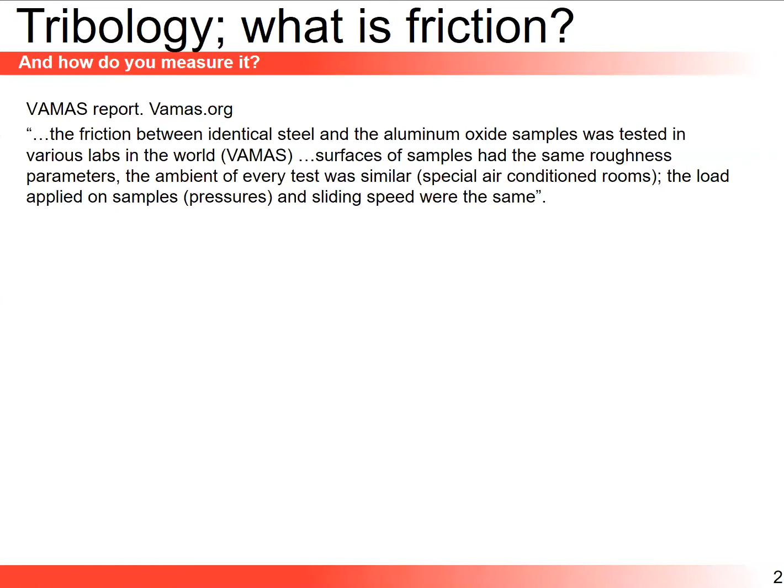For this, I'm turning to this extract from a VAMAS report, where this organization provided identical steel and aluminum oxide samples to various labs around the world with everything controlled - roughness, ambient temperature, sliding velocity, load. So everything is controlled, and they asked expert labs, people who really know what they are doing, to measure the friction coefficient. And that's the data that came back out of this report.

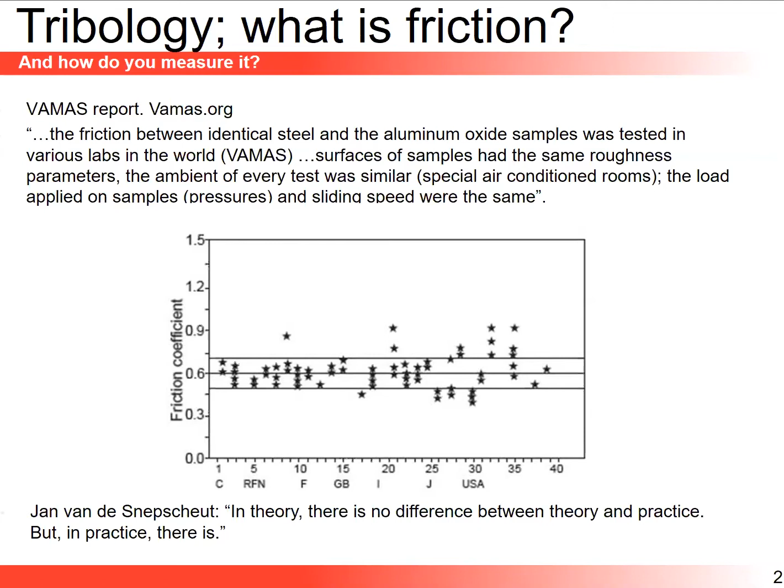So there are many good reasons why measuring friction is challenging - it's not well understood. I like to cite this scientist, Jan van de Snepscheut. He was, I believe, a computer scientist at Caltech in the USA, and he got crazy at some point - he wanted to kill his wife with an axe, failed to do that, burned his house, his wife and 3 kids could escape, but he died himself in the burning house. He said, and I love this sentence: in theory, there is no difference between theory and practice, but in practice, there is. So measuring friction is challenging.

So this talk is about third body generation for the most part, and related topics. There's a huge variety of mechanisms, physics and chemistry that explain why it's very hard to come up with predictive models of friction.

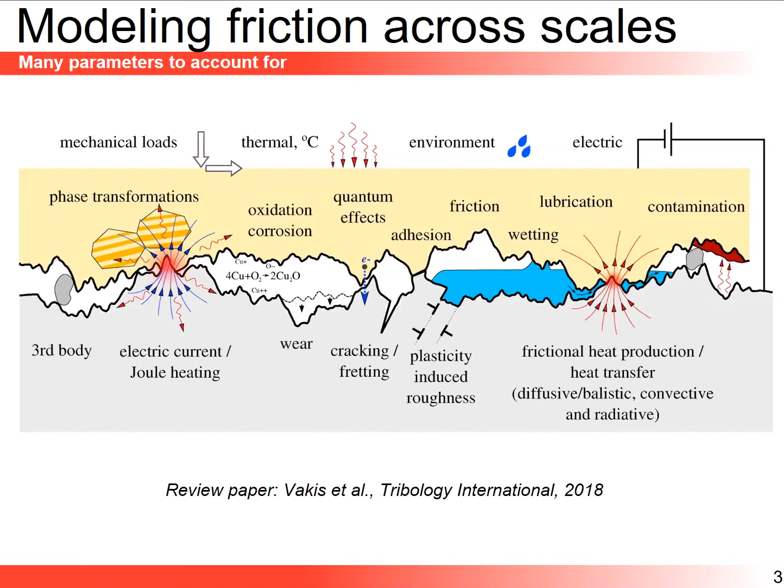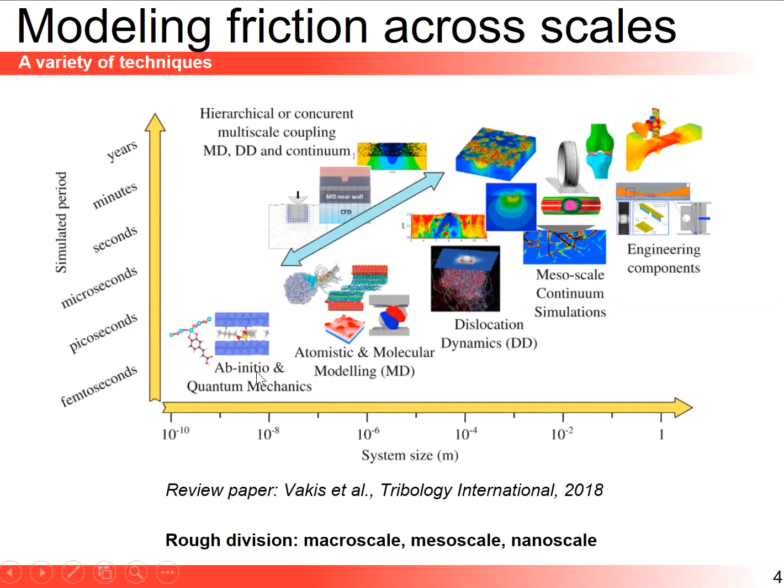Because of these different mechanisms, there's also a huge variety of scales and modeling techniques you can use to look at a frictional problem, and depending on what you choose, you'll have advantages and disadvantages. You may choose to work at a very large scale, the scale of engineering components like a tire and a road, and for this you may resort to finite element modeling, which lets you model very large system sizes and time scales - the vertical axis here - but you'll miss physics and chemistry from smaller scales. For that, you could go to ab initio simulations, but the drawback is very small system sizes and time scales. So there's no free lunch.

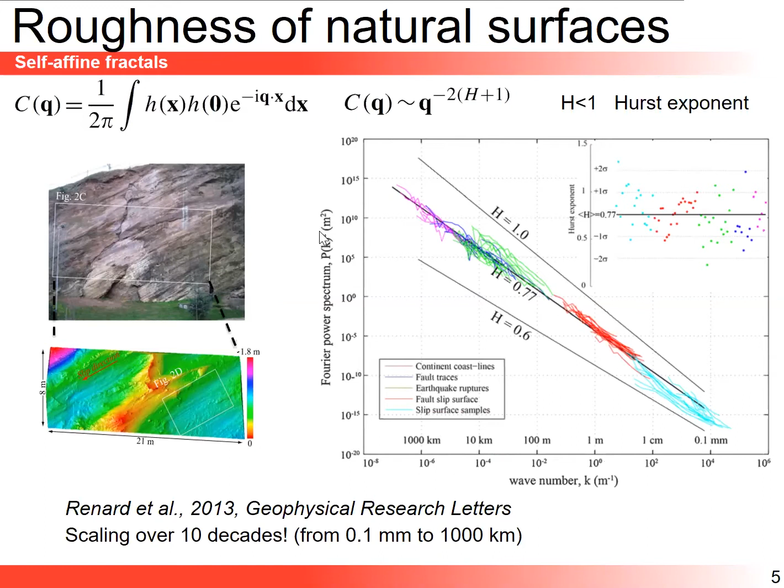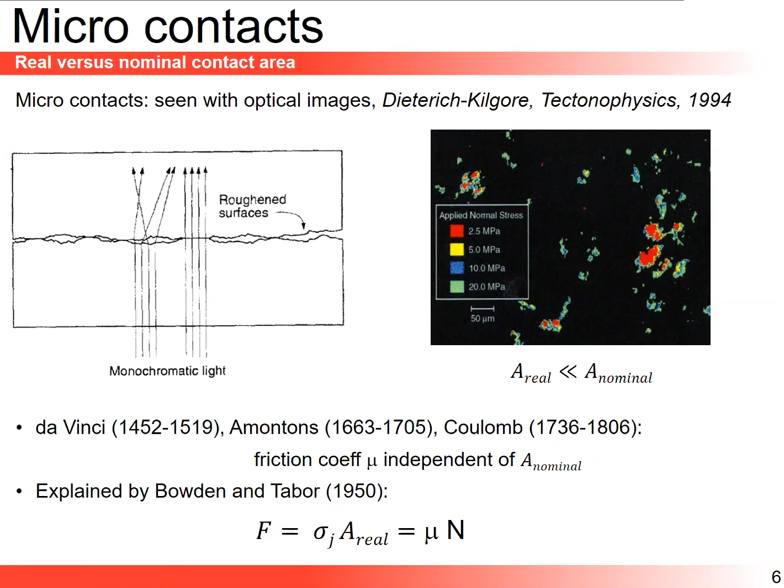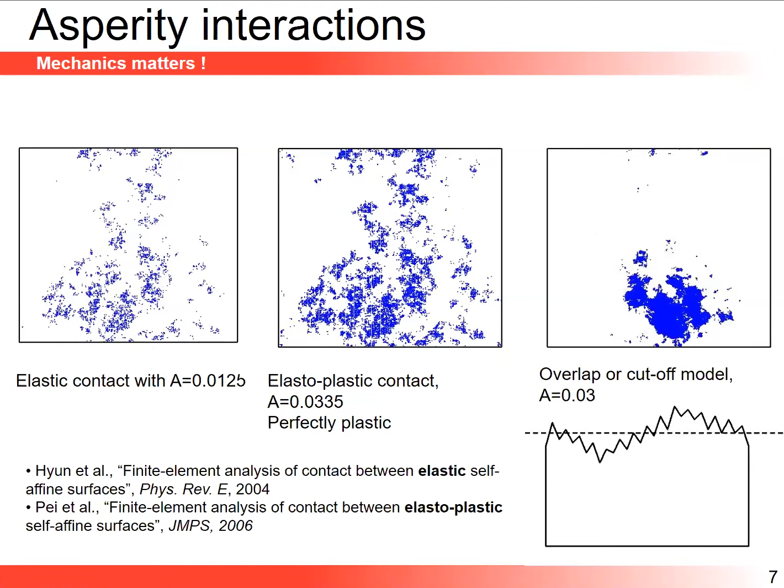So mechanics matters, which is good news for us with a mechanics background. So, this was a general introduction. Now I'm going to go to the heart of the topic.

I want to discuss wear of materials. So if you think friction is complicated, and it is, well, the bad news is that wear is even more complicated—it's messier. So here I'm citing Ernest Rabinowicz.

This is his seminal textbook on friction and wear of materials. And in this book, he writes that wear is an important topic. But although it's important, it has never received the attention it deserves.

The reason is that it's perceived as a dirty topic. There's complex physics and chemistry. There are many forms of wear—adhesive and abrasive wear are the top two. There's history, the roughness evolves with time. You form third bodies, you form gouges, different regimes.

I cite here at the bottom of the slide one of my favorite papers of all time, Meng and Ludema 1995, summarizing 50 years of research on friction and wear. In this paper, they give you 300 different equations on friction and wear, some with 25 different material parameters and fit constants. So there's a lot of empiricism in the field.

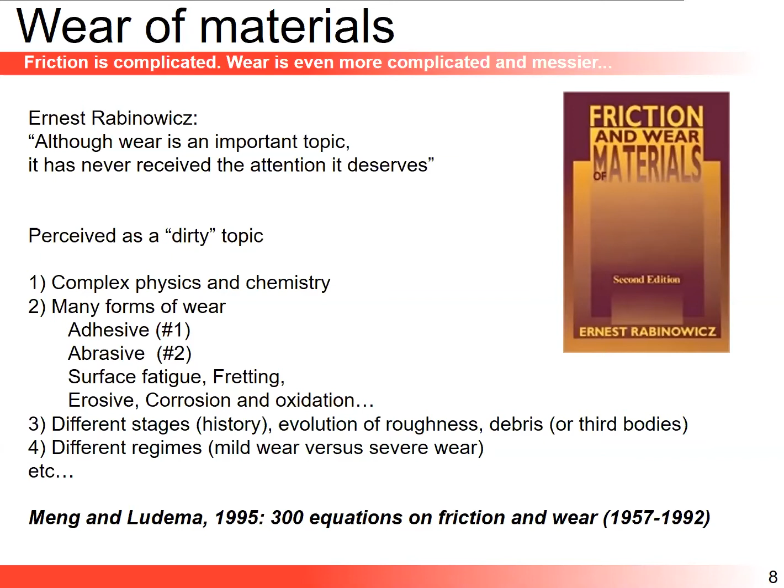What we aim to do is go back to the basics of the mechanism, to develop insights and come up with a predictive understanding, with no fit parameters, of the production of wear debris. That's our goal. It's very ambitious, and it'll keep us busy for many, many years to come.

Here I'm turning to the most known and most used equation for wear, out of those 300 equations. It's called the Archard wear law, very popular because it's very simple. This equation tells you that the production of wear volume V is linearly proportional to the applied load, linearly proportional to the sliding distance—which you can relate to the life expectancy of a component in an industrial machine—and inversely proportional to the hardness of the material.

And you have data here showing indeed this linear curve, this linear proportionality. The only problem is with this theory—and we go back to where this theory emerges from, a micromechanics description of why this equation comes to us. But the only problem is matching this theory to experimental data.

You need the famous K wearing factor. And this K wearing factor is not a small correction. It's not a 20% correction, it's not a factor of 2 correction—hell no, it's not even a factor of 10 correction. It's a correction, let's say, of 6 orders of magnitude. So it's a gigantic correction. And we don't know what K is.

To me, it's a major problem. Usually K is interpreted as a probability—surfaces are rough, we develop millions of microcontacts, and let's say 1 per million will form a debris. The moment you set a probability, you're confessing that you're playing a mathematical game, you're losing the physics, and it doesn't give you insight into truly what's happening, and why, and where you form debris.

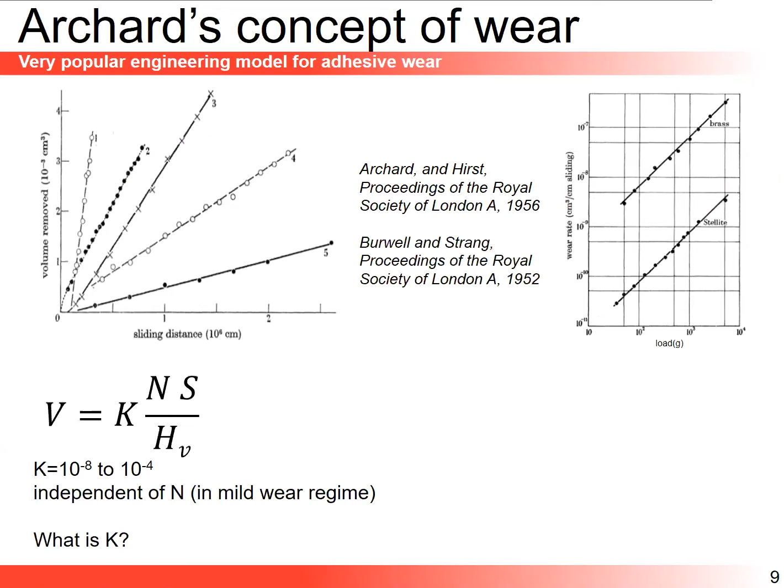When Archard came about with his model in 1953, there were competing theories. As a caution mark, in this talk I will not be mentioning what's known as the small load limit, grazing contact, where N is very, very low. This has been discussed in the nano-tribology community more recently, where it's been shown that you have an atom-by-atom attrition—it's a thermally controlled process, you have a breakdown of Archard. So I'm not discussing this.

I'll be discussing the higher load limits, where we have really strong interactions between asperities. Historically, going back 70 years, there were two competing theories. A theory from Holm saying that when you form an adhesive bridge between two asperities—here in the schematic, the strong adhesive forces—as you shear your system, they're going to move past each other by plasticity-induced atom removal.

Archard and others said no—when you form an adhesive bridge, you're going to get cracks and you're going to form debris. You see it here at the bottom, and you even have evidence from atomic force microscopy, with tips that are broken—you see a tip that has been broken and is attached to the side of the AFM.

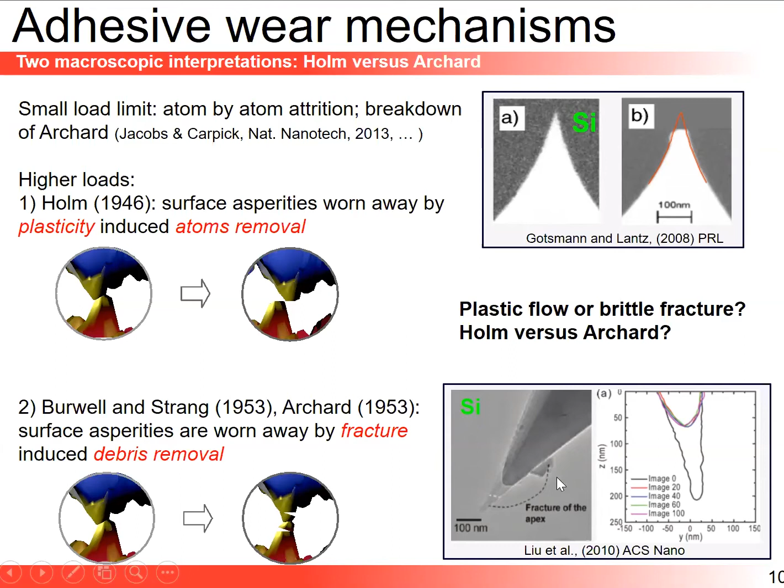So we have two competing theories, and five years ago we came up with a theory with Ramin Aghababaei and colleagues, and Derek. We came up with a model that says everyone is right—very consensual, very Swiss in a way—where we say both Holm and Archard are right. The only thing is, depending on the system, material properties, and geometry, we have a brittle-to-ductile transition, which has been known in material science for a long time.

So the model is very simple. It's basically a Griffith fracture mechanics approach. We take a very simple geometry of two hemispherical asperities, establishing a junction of size D. As you load your system in shear, you're going to store elastic energy in the system, proportional to the elastic energy density.

The elastic energy density is the strength that the junction can carry, sigma j. You cannot go above sigma j because it will flow plastically. So sigma j puts a cap. Sigma j squared over twice the shear modulus is the elastic energy density, and I'm multiplying this by the volume

of the two hemispherical asperities, so d cubed. So you store elastic energy, and you may use this - that's a second mechanism, that's Archard, to create some new surfaces. There's a price to pay for this.

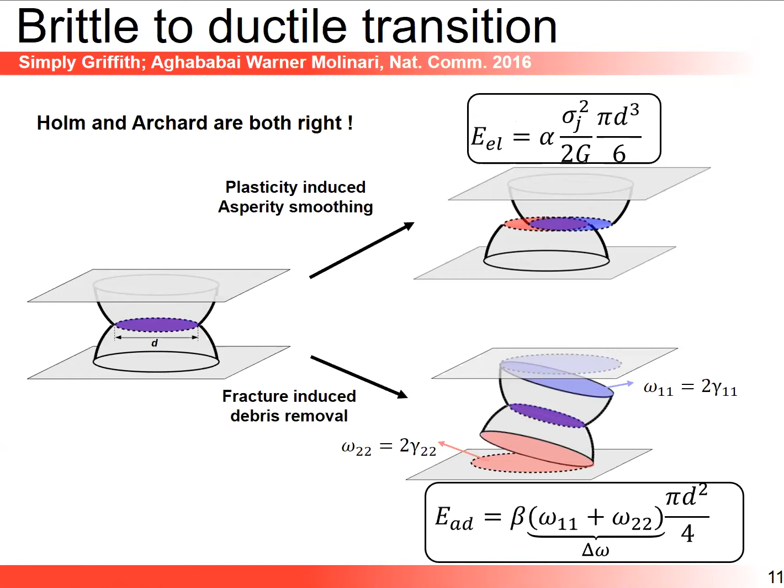This is the adhesive energy. You create new surfaces, so the surface energy term is called delta omega, and it's proportional to the new areas you need to create. That's why you have a D squared term. We're assuming we cut the asperities at the base - it's a very gross approximation, but it makes our life simple. That's why alpha and beta are fudge parameters that won't vary the findings by more than a factor of 2 or 3.

So this simple idea has generated a lot of activities in my team, and still does. We'll give you some perspectives at the end on still-open questions, and there are many.

I will not discuss much what we did in this paper regarding comparison with AFM, but this simple equation could explain a lot of discrepant AFM data. I'm just citing one paper where they discussed that as they increased the tip size of the AFM going down, they reported a transition to plastically dominated wear for narrow tips, and for large tips they have brittle fracture dominated wear. So precisely what we are saying, and there's a lot more data we could discuss on this.

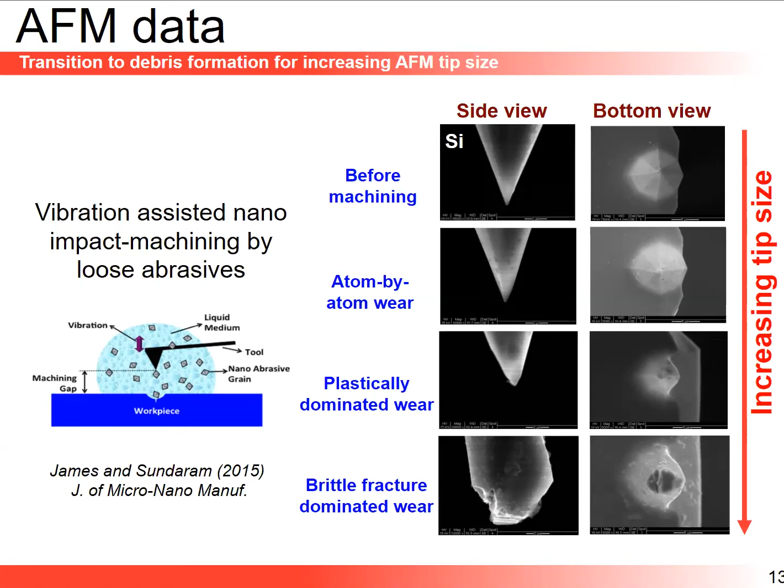Also for the inside story, this finding did not come directly to us. It was a struggle over many, many years, and not only for us - I'll say for all the molecular dynamics community looking at wear mechanisms. I can say that up to 2016, all the reported data, to the best of my knowledge, showed the ductile mode of deformation and not the brittle mode of deformation.

To illustrate my point, take the data of Peter Spijker, who was a postdoc in my team 10 years ago. We did simulations of two rough blocks sliding on top of each other. This is the initial roughness with some self-affine surface properties. We rub the blocks together, and very quickly you see that we kill the roughness. We develop plateaus, like butter that we cream and spread on a piece of bread. So we lose the asperities very, very quickly.

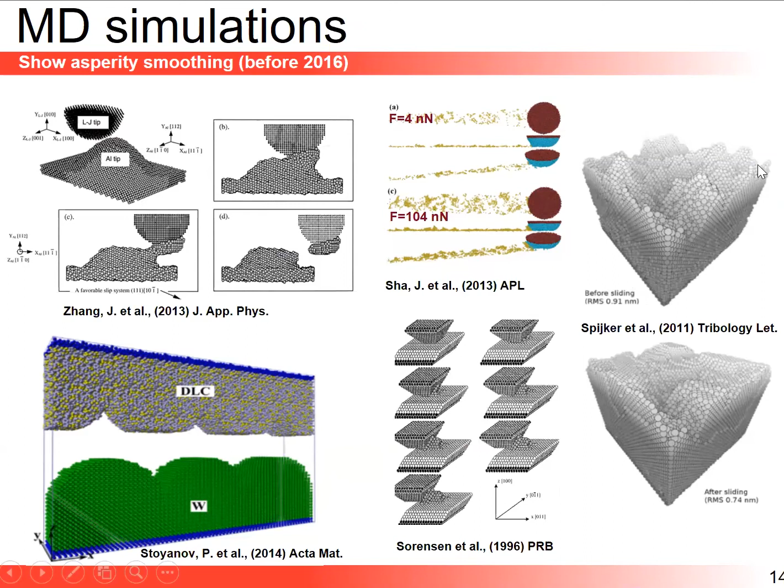And there's good reason for this. The reason is that to get this brittle mode of debris formation, we need to resolve the process zone size at the crack tip, and this is a large quantity for atomistic simulations. Keep in mind that for this box here, this was a copper material with an EAM potential, and the size of this box was about 32 nanometers - a tiny, tiny quantity when you think of a typical problem we look at in traditional mechanics.

So here, this is an Ashby map. You have different groups of materials - metals are here, rocks are here - and this is fracture toughness as a function of yield strength. An estimation of the process zone size at a crack tip, the zone where you have nonlinear dissipative mechanisms occurring, is a ratio of fracture toughness to yield strength squared, and this is a large quantity. I'm reporting values here with those oblique dashed lines. So for metals, it's typically millimeter sizes. For ceramics, it's typically micrometers.

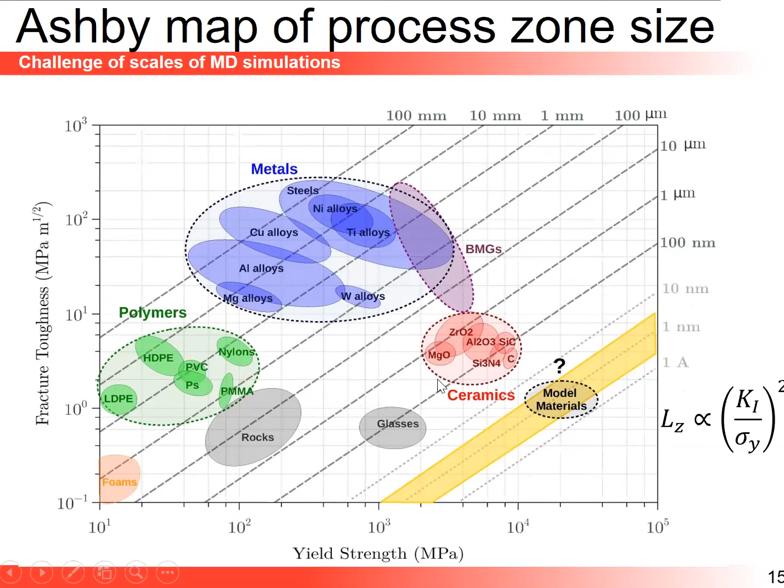So, orders of magnitude too large for what we can achieve for most materials with atomistic potentials, classical molecular dynamics. So what we did originally to find this brittle mechanism was to come up with model materials that are extremely brittle, so that we lower their scale to domain sizes we can quickly solve on our computers to develop this insight. Now we're moving back up to more traditional potentials, looking at ceramics, and we're able to see this transition at a higher cost, but we can do this. So the original simulations are here.

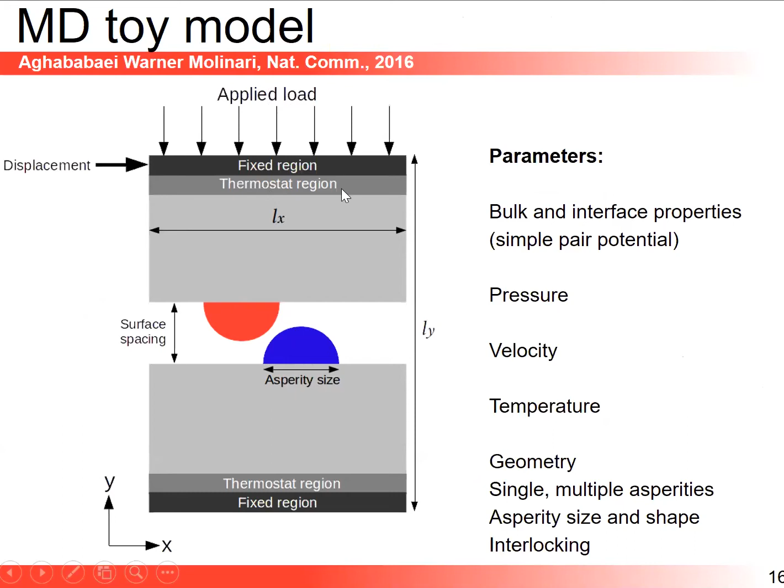Just to illustrate my point, I'm going to show a case of two colliding asperities. The coloring is artificial, just to see where things are moving. We maintain a fixed pressure, we'll have periodic boundary conditions on the side, and we apply a displacement.

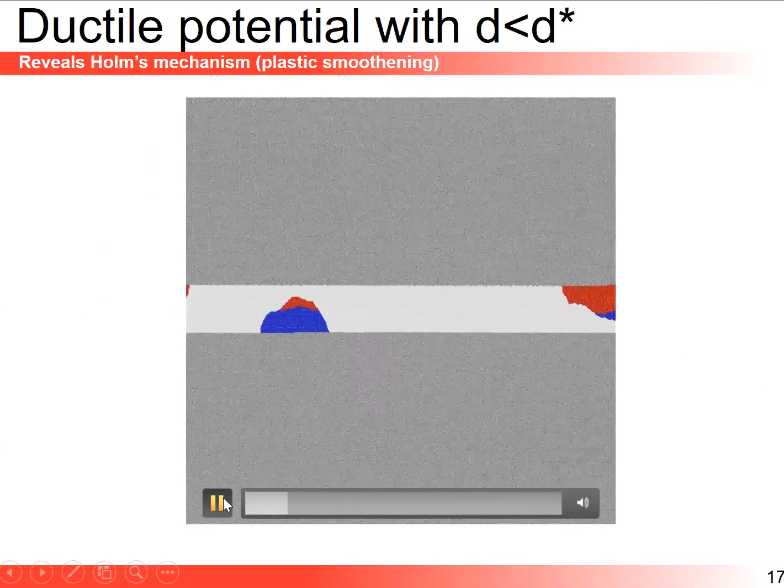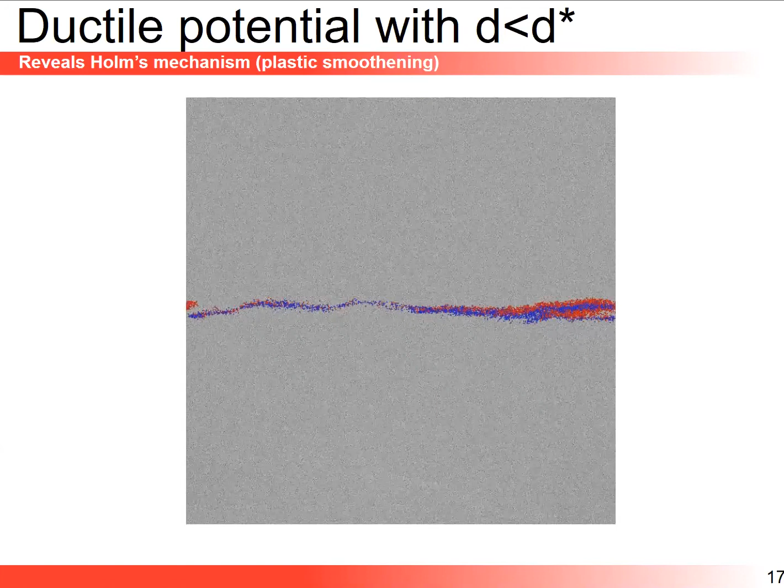And what we saw is that if you develop a junction size which is smaller than this D star, we observe what everyone else had observed: a lot of adhesive transfer from one surface to the other. Eventually, because we maintain the pressure, we close this gap, and we have not formed debris. So a lot of plasticity—we are ductile, but no debris formation.

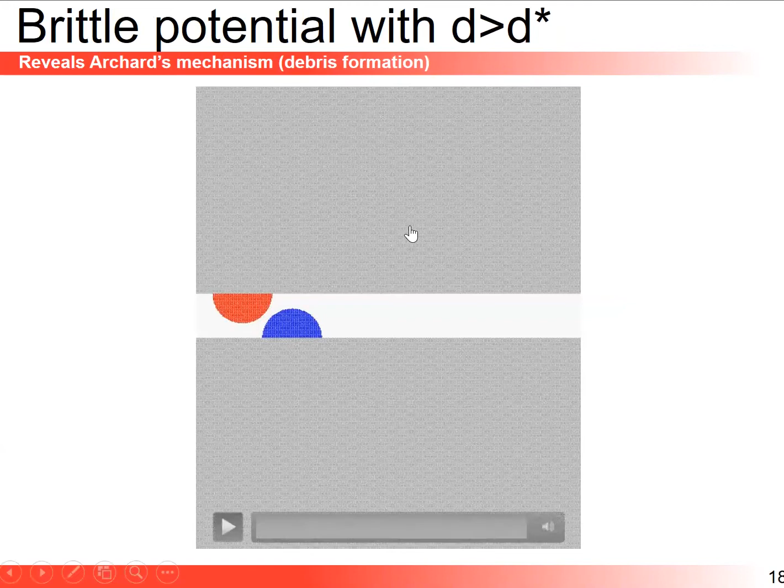So now I'm not necessarily changing the material properties here, but we make the junction size D larger than D star, and something completely different occurs. We get cracks, and you see you start forming rolling debris, which is incidentally creating a roughness—you don't flatten the surface. You have debris with a well-defined size.

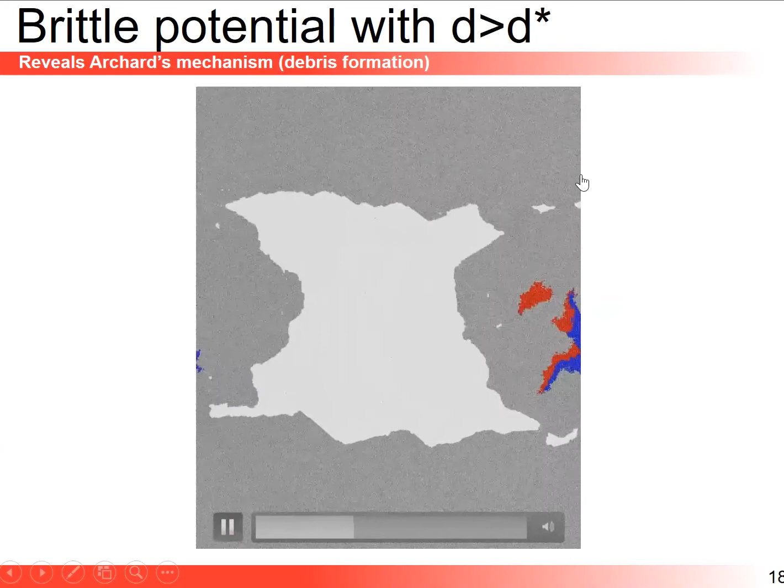As I said, this has been repeated with more realistic potentials, also in a 3D setting, and consistently what we have observed is that if D goes above D star, we transition to forming debris.

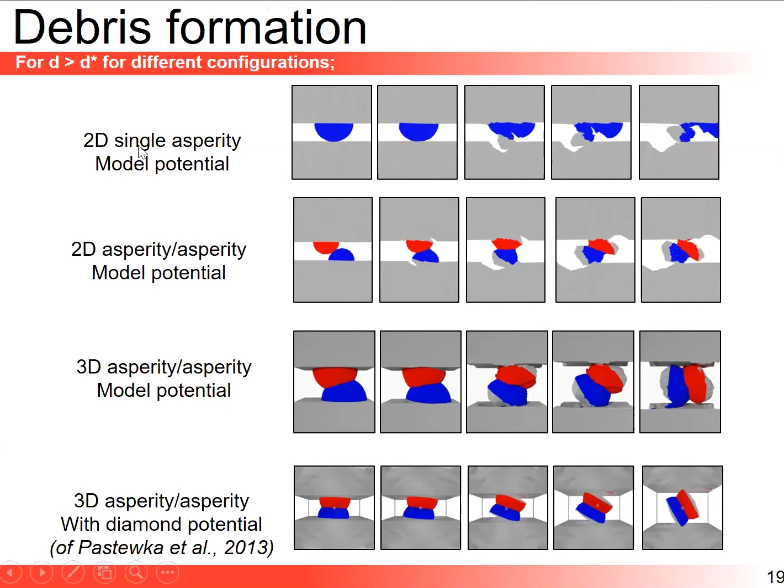Okay, so now let me go back to Archard law. As I told you, Archard law requires this unfortunate K factor, which is called the wear coefficient. It varies widely in values, and it's viewed as a probability. For us, it's not a probability anymore.

If we're at the scale of an asperity—here we're looking at an asperity—if I pick the geometry of the asperity to be larger than D star, we know we're going to form debris, and therefore we have 100% probability of forming debris, and K is equal to 1. If not, K is equal to 0. So K is not a fudge parameter for us anymore, it's 1 or 0.

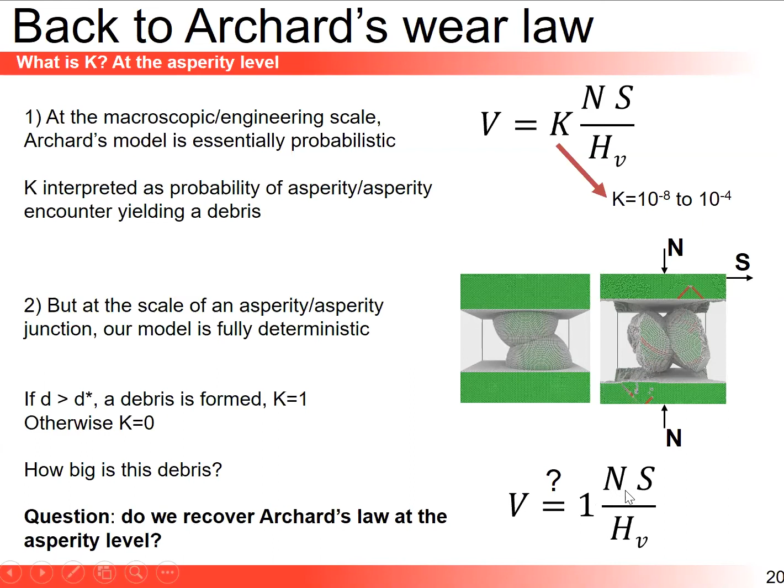And we can ask the question: do we recover Archard law, that the wear volume is N times S over the hardness? Just to tell you where this equation comes from—I told you I'd do this early in my talk—I'm going back to the classic Archard paper of 1953. It's a very short paper with beautiful mechanistic insight.

So we're looking down at an asperity at a contact junction, and we slide it. As we slide, we lose the contact after a sliding distance of D. The wear rate W is really the ratio of the volume of debris formed over the sliding distance. The sliding distance is proportional to D, and the volume of the debris is proportional to D cubed, so you get D cubed over D—that's D squared, which is an area.

And in Archard's model, the area is proportional to normal load over the hardness. So V over S equals N over H, therefore V is N times S over H. We recover Archard's value. So we tried that.

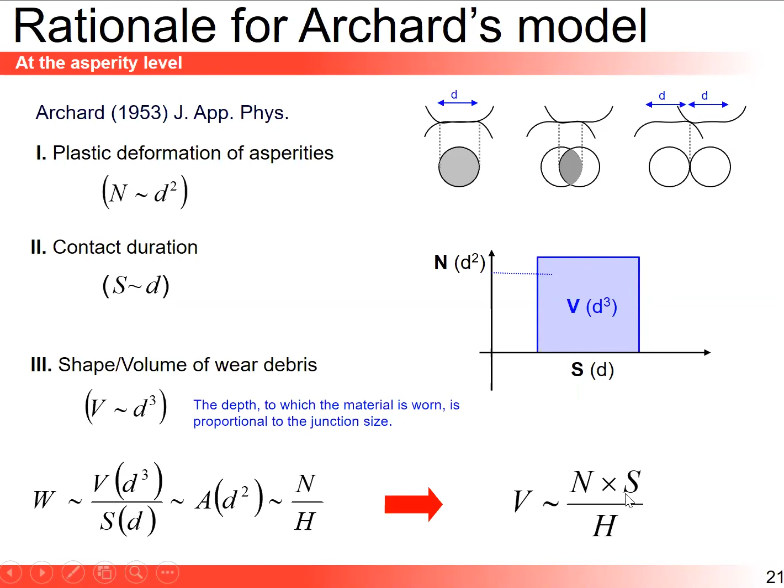We tried that because we can control in our simulations the applied load N, we can control the hardness, and we can measure the debris volume V as an output of our simulations. From a debris, we take it out and count the number of atoms in it. All those colored points represent different simulations in 2D, in 3D, with different potentials, and you see that we don't find a correlation between those two quantities.

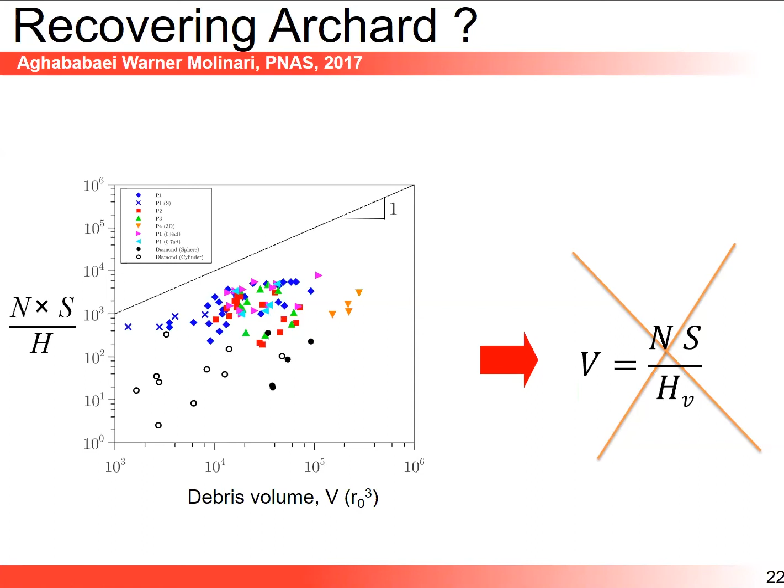So we don't recover Archard, and the reason is actually very simple. At the core of Archard's model is the assumption that the contact area is proportional to N, but it's not for us. The main reason, well understood in the community, is that we have adhesion—we're looking at adhesive wear at a small scale. Because you have adhesion, you can form a non-zero contact area for zero applied load N, so we don't have this proportionality between those two quantities.

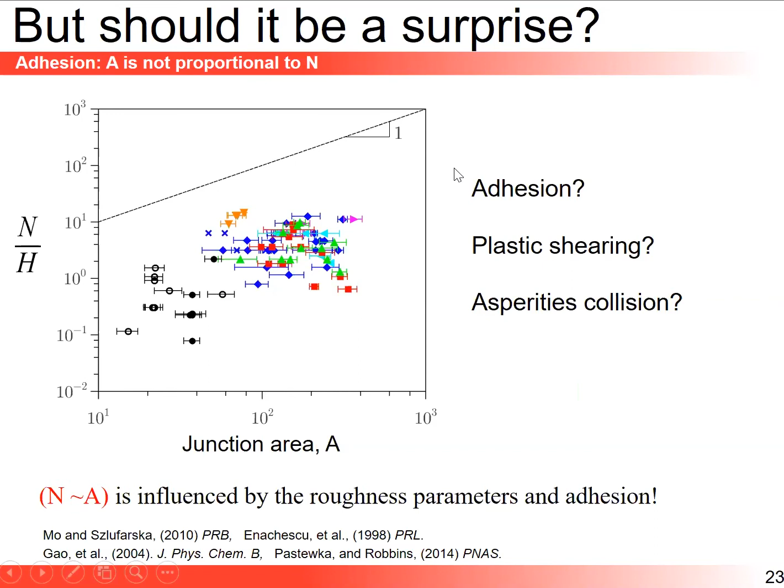It turns out it's an old concept in the tribology community. There's a paper from a mathematician and geometer from Germany called Reye, who wrote a paper in 1860 in German, with very few citations, much less cited than Archard. In this paper, he recommends using the frictional work to predict wear volume. It turns out that at the macroscopic scale, if you can neglect adhesive forces, those two models are equivalent.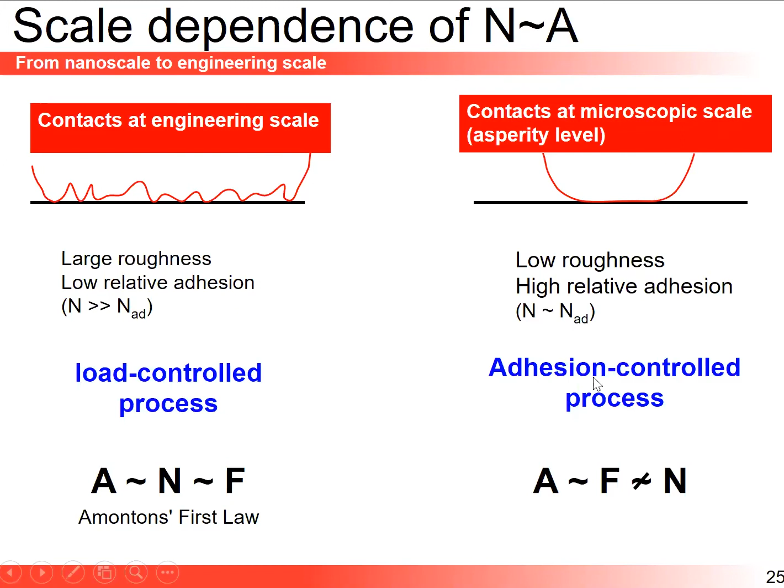But what our paper showed is that it gives us a means to bridge between scales, to bridge to contact at the micro scale or atomic scale where adhesive forces are important.

Quickly, just as an opening for an open question: I've told you that we can predict how big particles will be, or rather how small they are, because the minimum particle size we can form is larger than D star. D star sets the minimal length scale that can form in the debris.

And I think that's relevant for transportation. We know that air pollution is an increasing concern for societies, and it's less and less due to exhaust pipes. We are moving to electrical cars, and more due to wear of brake pads, tires on roads, and so forth. So here I'm showing a brake pad.

That's a new brake pad. We measure the roughness of this brake pad at EPFL. That's a worn brake pad, the roughness has changed tremendously. Brake pads are a very complex material, a composite with lead, with tar. It's really a mixture, and we do not know what the minimum particle size is for such a complex material mixture.

What we have done so far was with a homogeneous material, a perfect material, but now here we have defects, we have inclusions, and I think that still remains an open question.

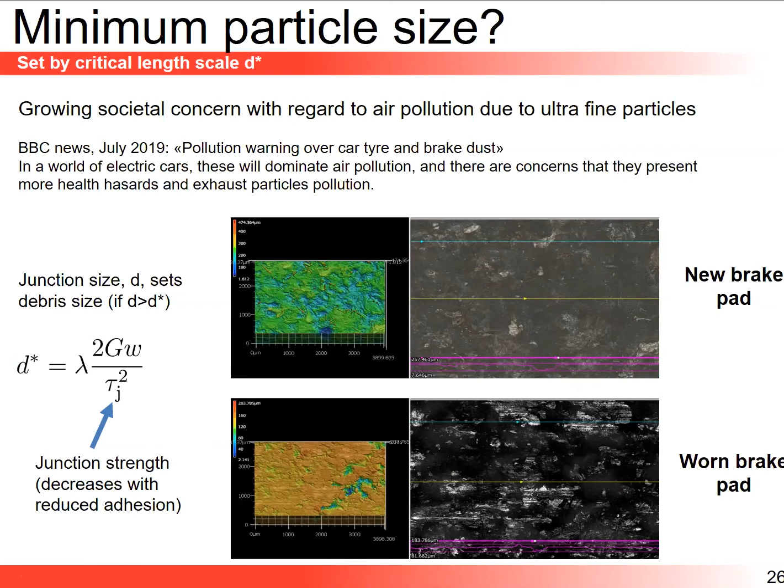Also, what's intriguing to us, just one slide to summarize this more recent paper from a student in my lab, Enrico, is still a mystery to us. But I told you that when we form debris, we observe that over a long time scale, we develop roughness.

We've extracted this roughness for the bottom surface and also for the top surface, and we see how the RMS, root mean square, evolves with time. We reach a steady state eventually. And we try different systems.

Some systems were initially perfectly flat, like this one, except for this little bump. We tried also systems with initial roughness with a well-defined Hurst exponent. And we tried different mixtures of material, different colors represent different material properties. Again, here we form debris and we develop roughness.

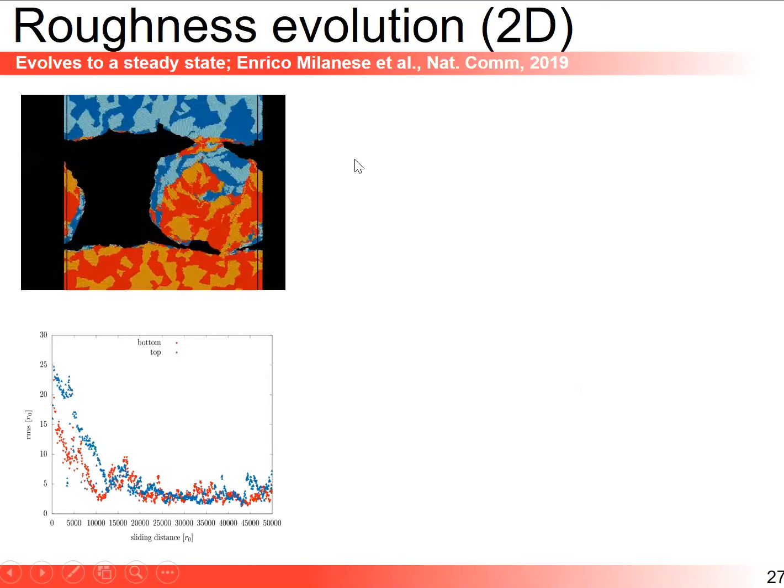And we've computed the PSD, the power spectral density, as I've shown you earlier with François Renard's data. Of course here we're limited to only 2 to 3 orders of magnitude, because these are very long and expensive simulations. We cannot do 10 orders of magnitude like data directly observed on rocks. But what I want to show is that we recover power laws with a Hurst exponent very close to h equal 0.7, what is observed with natural rocks.

And the reason is that the key ingredient required is to have third bodies with two competing mechanisms: ductile deformation competing with brittle fracture. We are working on a simple geometric model, a random deposition model, to try to understand this better, though I won't present that today.

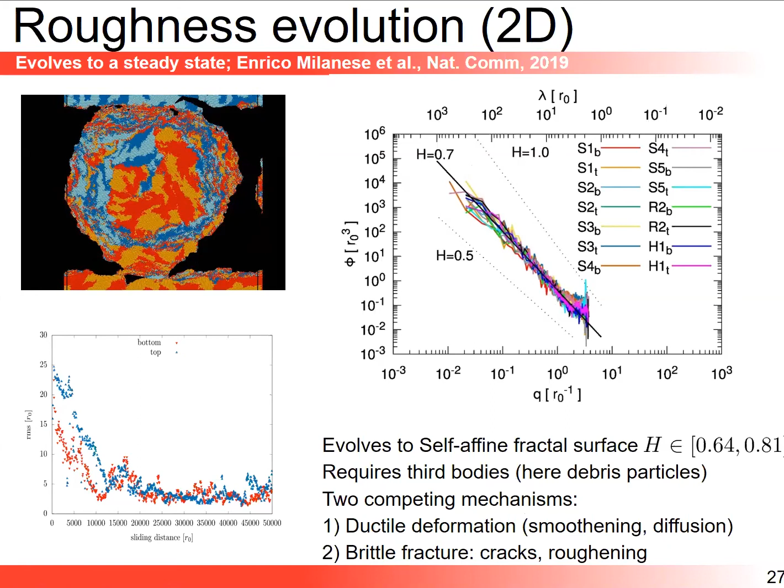We're also trying to finish extracting data, and I won't cover this again, but just a teaser slide where we move from those 2D simulations to really 3D simulations we could access at the time, using the fastest supercomputer in Europe—now I think it's number 3—located in Switzerland, in Ticino canton.

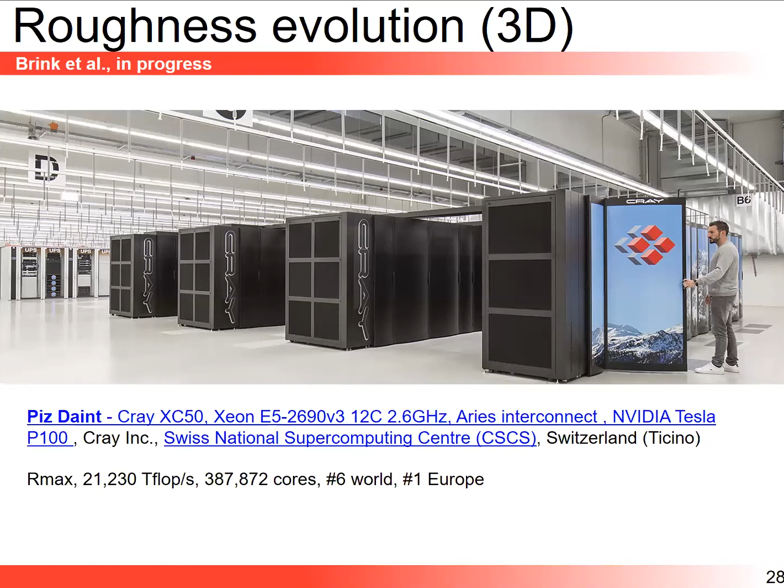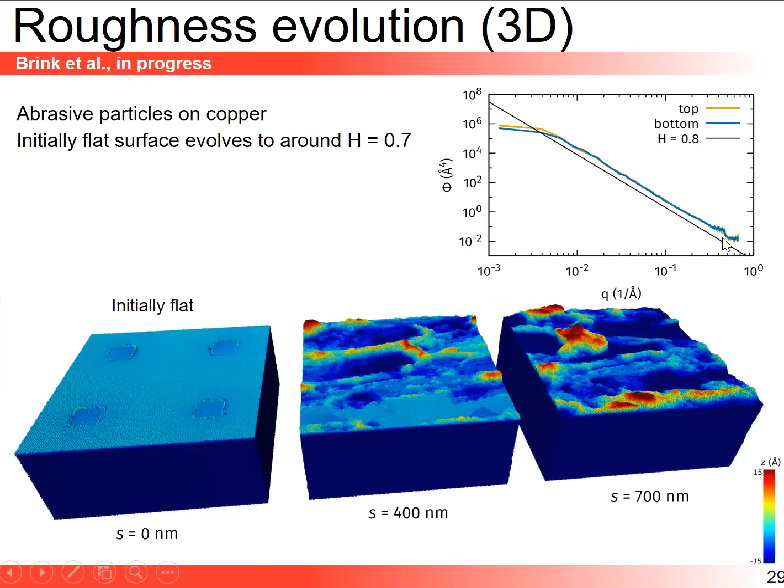With this, we could look at roughness evolution in a 3D setting. So you see that starting from something flat, we arrive at something rough, again with evidence of self-affine scaling for the surface. We've also looked at interactions between debris particles. Here we're looking down at the interface, and these are particles that, as they move along the surface, accumulate mass because of adhesive forces.

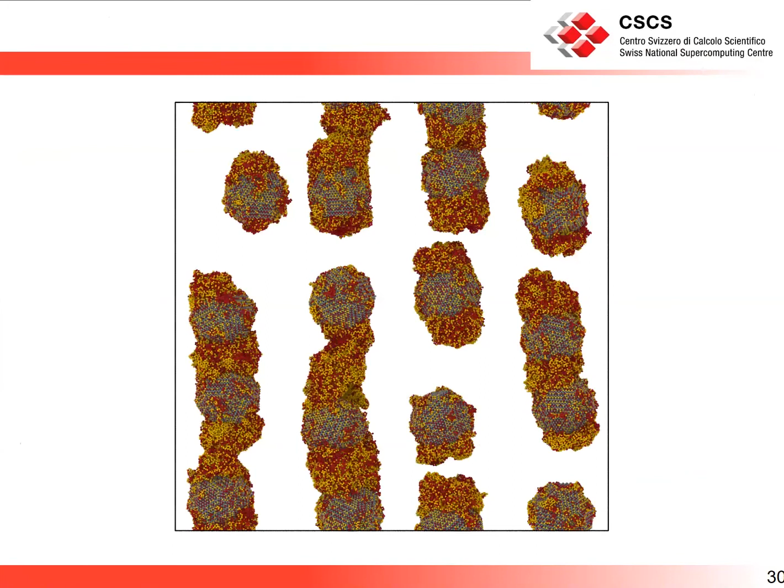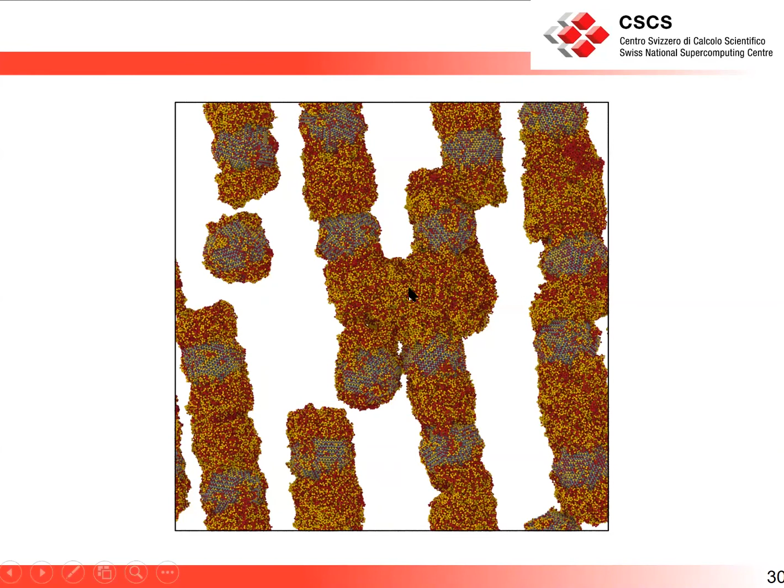So the molecular dynamic simulations again. You see the accumulated mass grow in length, becoming like a French baguette, if you want. They start to attach to each other, and you can tell the sliding direction is left to right, at a slight angle. As they attach, they elongate in one direction. They also start to attach on a side, and this has important consequences on the emerging frictional properties of the system.

Okay, so for the last 7, 8, or 10 minutes or so, I want to go back to contact morphology. I told you in one of the first slides that asperity interactions matter, and I want to give you hints of what we could do to explore this a bit further.

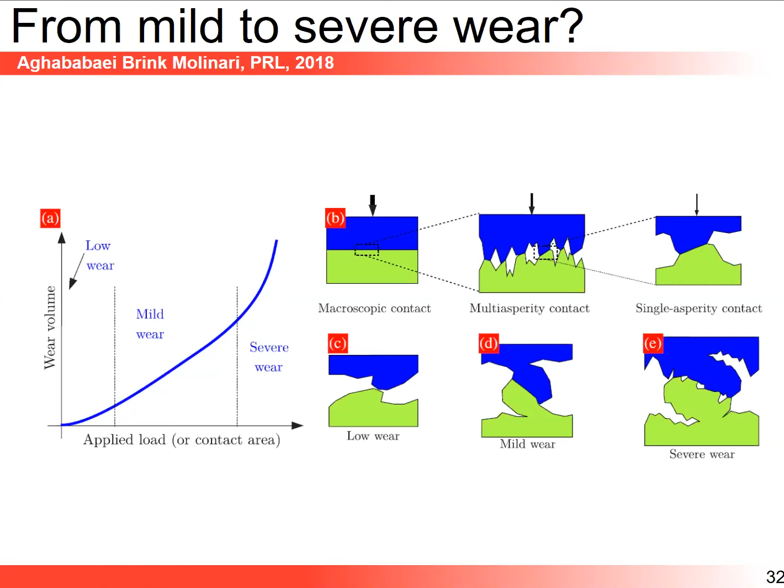We can see this in simple 2D atomistic simulations. Look at this inset where we have two contacts occurring in those red regions. If you shear the system, you develop shear stress beneath the surface, tau, which develops two peaks in red here at the two disjoint contacts. Because both of them have a junction size larger than d star, you form two debris. At a later time in the history, you have formed two debris particles.

However, if you reduce the space between those asperities, lambda being the spacing, and bring them very close together, you realize that you form a single debris with a larger volume than two combined single debris. That's because there's elastic interaction. You see the stress peak becomes a single peak in the stress field underneath the surface.

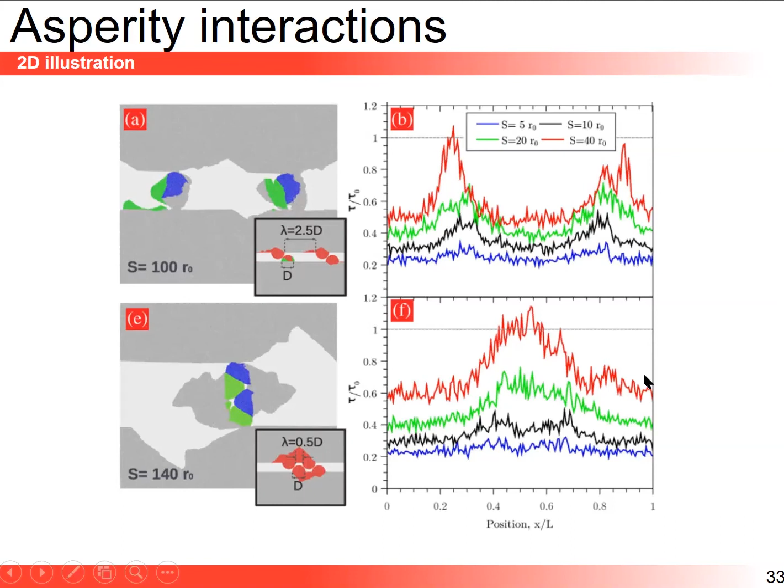Let me skip this - same illustration in 3D. A mechanism we have observed is a crack shielding mechanism, where at those two junctions you develop cracks at the corners of the junctions. You have a crack here, a second one there, a third one here. You develop a fourth one at the red regions with high tensile stresses. But this inner crack propagates a bit slower than the outer crack, and is therefore unloaded by the propagating outer crack. This inner crack shuts down - it's healing itself. Therefore we get one large debris when asperities are close by.

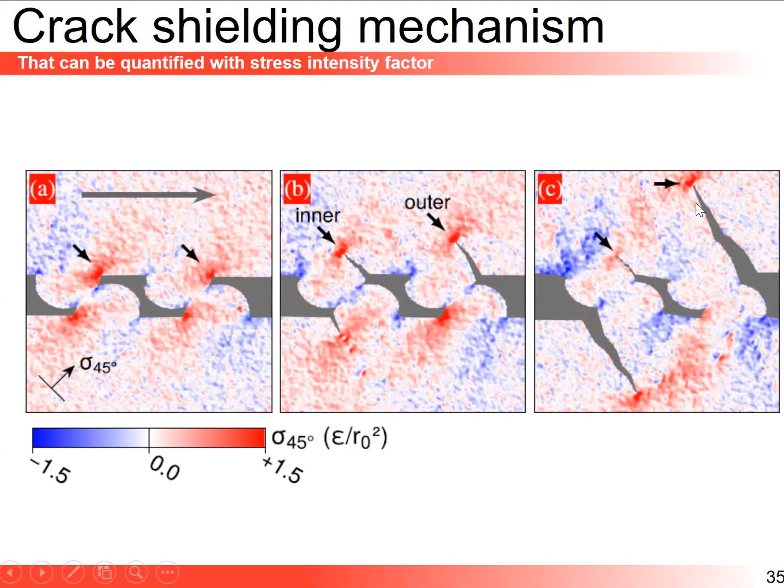So if you look at the total volume of wear mass produced as a function of lambda, the space between the asperities: if lambda is large, basically larger than a junction size D - this is 1 on this axis - you form two debris each of volume V naught, the volume of a single small debris, so you have a value of 2 on this axis. However, if lambda gets smaller than D, you transition to a severe wear regime where you form a much larger debris.

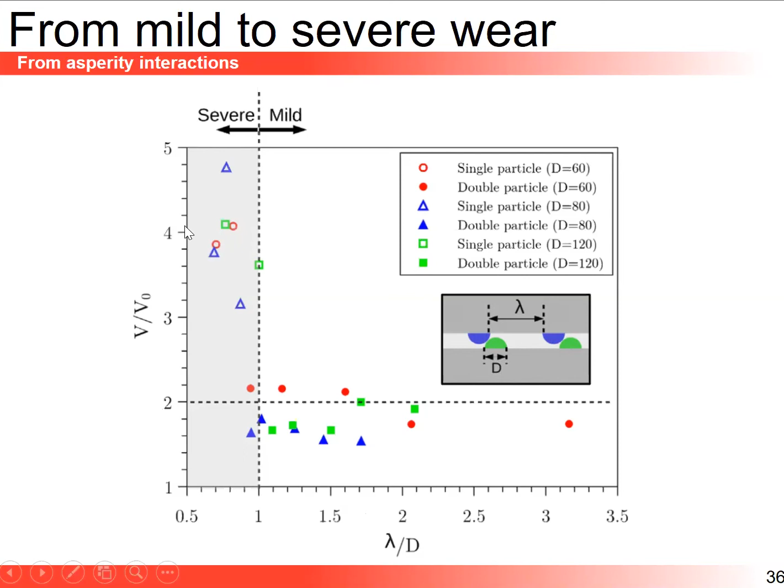It turns out there are a lot of interesting perspectives to extend this to continuum models. Here I'm turning to a very nice paper that Stella led when she was at Caltech with a student, Sylvain Collet, who worked with her there. In this paper, she uses phase field modeling of fracture to look at this precisely, except that with the phase field modeling approach, you can probe a material parameter space which is much richer and more precise than what you can hope to do with atomistic simulation, where it's hard to change the plastic properties with atomistic potential, whereas phase field modeling of fracture with a good description of bulk plasticity opens up the space for you.

So this is just an illustration from this paper, one out of many, to show that when two junctions are nearby, at those high tensile stress regions at the inner cracks, the cracks cannot propagate because the outer crack propagates faster. So she recovered those mechanisms, and again, that opens up a large field.

We've also probed this with the BEM method, boundary element method, where we look at a single body. This is a study from a student in my lab, Son Pham-Ba. He looked at this in a 2D setting where he basically got an adhesive wear map depending on the space of those debris, where you transition from plasticity dominated to separate debris versus large combined debris.

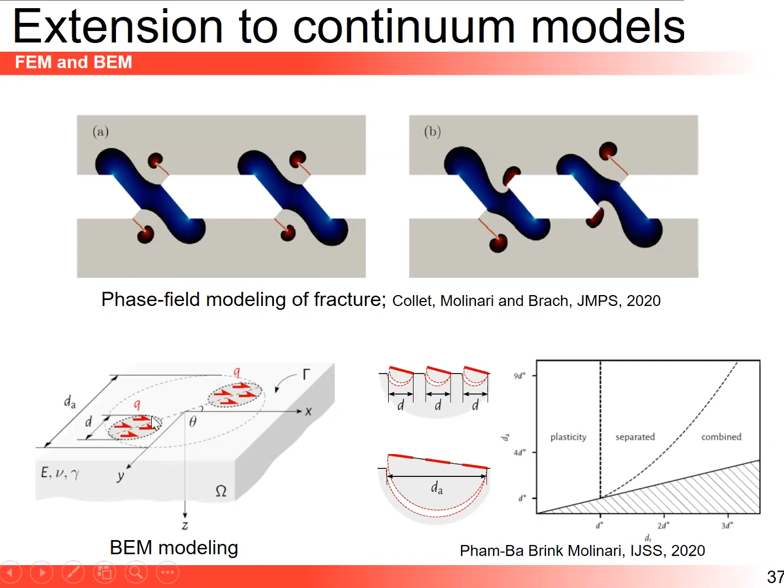But what I want to show in my last slides is moving the BEM simulations to 3D, to 2D contact surfaces or 3D semi-infinite bodies. So here we'll be looking down at a contact surface. We'll apply a shear load Q, and we're going to ask how we could optimize an abrasive tool to get the largest possible debris.

So the ingredients of this paper, which had just been submitted yesterday, it's on arXiv: we are using BEM modeling of a contact problem for elastic interactions. We use metaballs to define the contact geometry. Metaballs have a simple circular domain that defines the contact regions.

When field C is equal to 1, we're in contact. When C equals 0, we're out of contact, and we can merge those metaballs very easily. Two metaballs making a more complex geometry, and we're going to generate different initial organizations of those metaballs on our plane.

You have here some yellow representation of those contact regions, and we have 200 initial configurations. Then we use a particle swarm optimization algorithm to move those places around in order that, for a given total force, we maximize elastic energy—basically maximize interactions between those micro contacts to form the largest possible spherical debris.

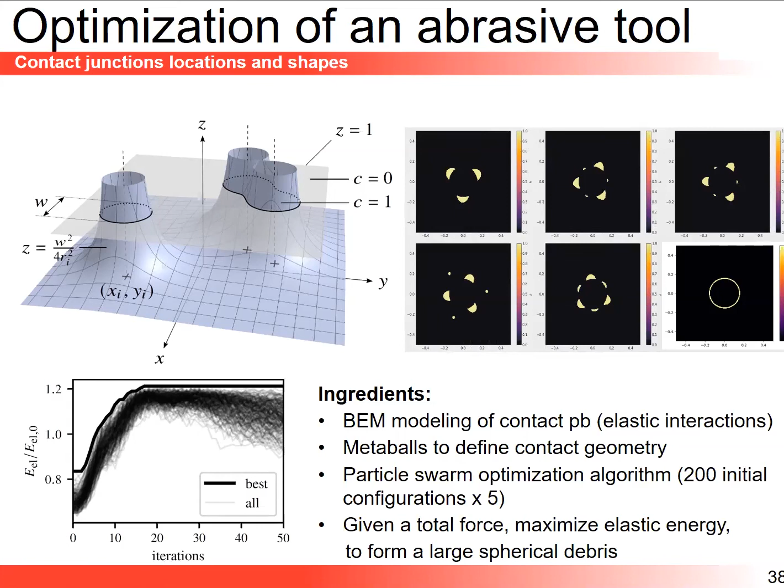So something that looked like a quarter of a moon of 3 microcontacts interacting, englobing a region, makes the convex hull that's going to succeed in taking off a piece of material in between.

And I propose an application for this—I actually got a patent for it. It's an ice cream scoop application made of this. We're going to do some testing. We have theoretical estimates of the energy gain, but no one believes the theory, so here's a design of this ice cream scoop that we've 3D printed.

We're going to attach this to a robotic arm and really cut through ice cream to see how good they are. So that's our idea of using this for a very simple tool application.

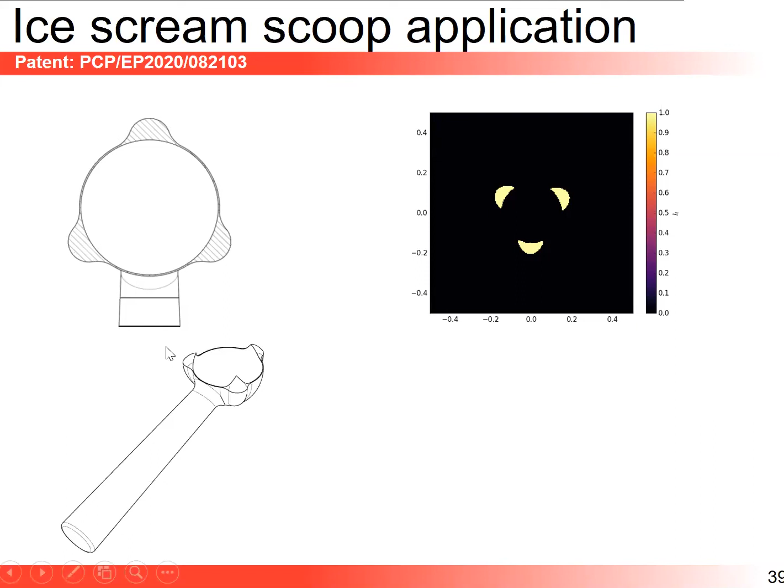Of course, you can come up with other designs. Here we propose 3 teeth. Others might propose to remove 3 teeth—that's this girl here—to also have an efficient design for eating ice cream.

So with this, I am at the end of my talk. Let me remind you some key points. I mentioned that you have a critical junction size that explains the transition in adhesive wear mechanism, that's function of material properties. I told you that the tangential frictional work predicts, without fit parameters, the initial debris size at the asperity level. This opens a path to a deterministic wear coefficient K, because K is not a probability, it's deterministic for us.

I've also shown you that third bodies and competition between ductile and brittle mechanisms yield self-affine surface roughness that naturally comes out of our model. And I forgot to say, when I showed the slide from Enrico Milanese, the amazing story is that the self-affine properties that emerge from our calculations are independent of the initial conditions of our system.

And we are actually doing experiments on the roughness evolution, and I've shown you at the end a patent application for an innovative design emerging from interactions between nearby microcontacts. With this, I thank you for your attention, and I'm looking forward to answering your questions, if any. Thank you.